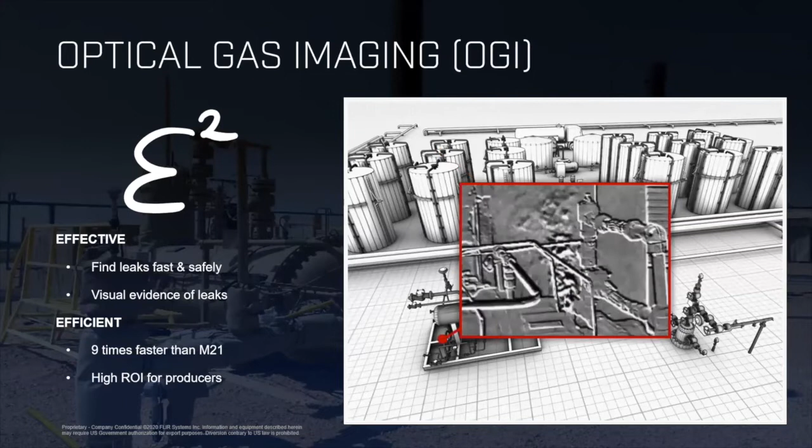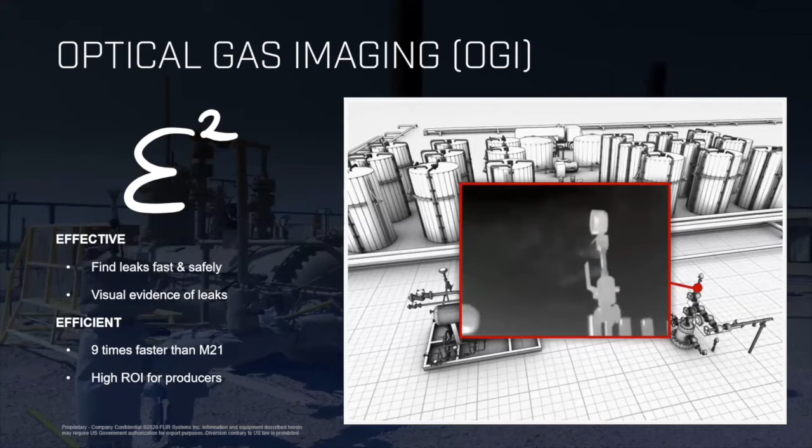Efficiency of optical gas imaging, with independent studies and field studies that have been done, it's 9 to 10 times more efficient and faster than other technologies like a TVA or sniffer. And even CODA talked about it earlier. It's a pretty high ROI, not just in the actual loss of leaks, but also the ability for organizations. And it was really interesting to hear a conversation which we've heard over and over about how these organizations learn more about their equipment and their systems by utilizing optical gas imaging in their LDAR programs.

A little bit on the optical gas imaging history, for those of you that may be a little new. The first commercial optical gas imaging camera came out in 2005, called the GasFind IR. It was a foundational camera for the EPA through the alternative work practice for Method 21. We took the industry feedback through the first few years of that product and came out with our foundational GF series, which is still the foundation product for us today, and advanced that product in 2017 with our GFX camera that is ATEX certified to be used in Class 1 Division 2 areas.

In 2019, we began getting outside of the regulatory confinement, and we launched the first version of an uncooled camera. I'll talk a little bit about this next, but it's an optical gas imaging solution, with this original product specifically geared for methane detection. It is not quite as sensitive as our GF series and our cooled solutions, but it allows organizations to go out there, and in essence, this is that piece of the puzzle that is a next generation technology for methane mitigation that's not directly tied, as optical gas imaging has historically been, to regulatory check marks.

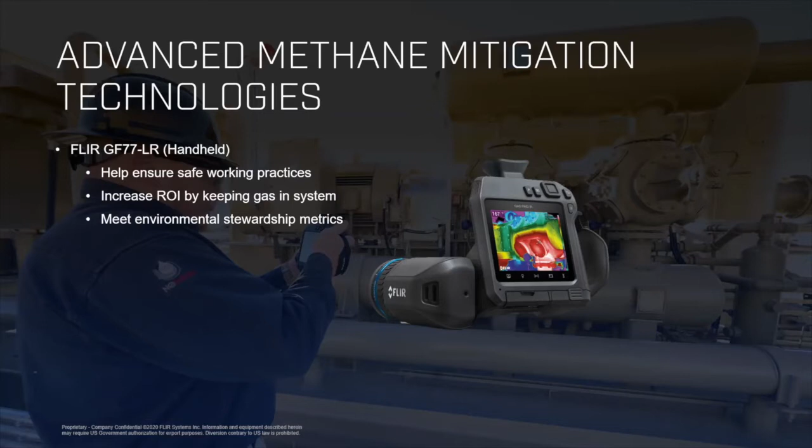This will not meet your Quad OA standards and requirements, but it allows companies like the ones on this call that are interested in furthering and advancing their methane mitigation outside of regulation. For those that might be interested in the same solution, but with a fixed mount opportunity, we have our GF77A. It is the guts of our GF77LR built into a fixed mount state-of-the-art automation camera.

So now this can look out, and we're working right now on the analytics, which is one of the videos you see going in the background. So we're working on getting better analytics, but we have industry partners out there with deployable analytics.

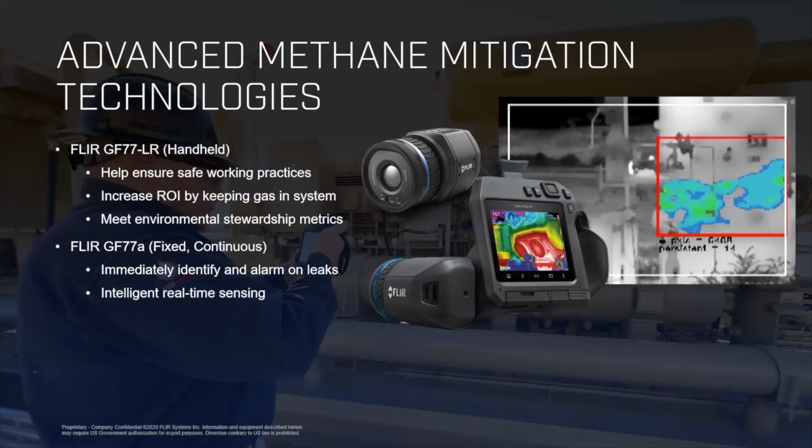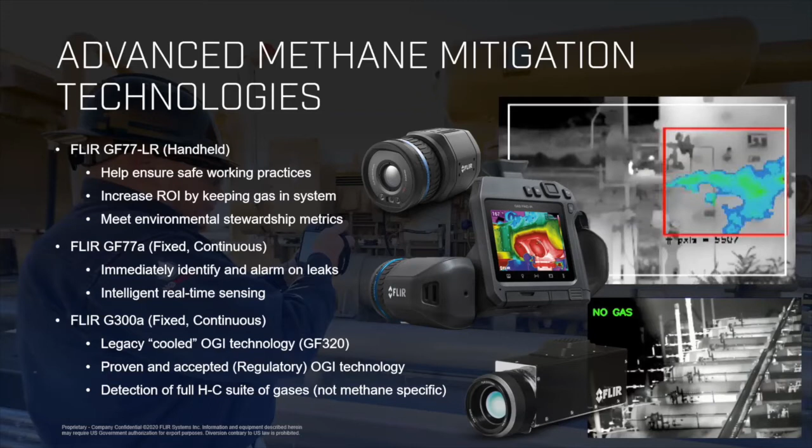And then for those that might be interested more in that mitigation, but also meeting some of the regulatory requirements, whether it be federal or state level in some of the states that you may operate, we do have a continuous fixed mount version of our Quad OA compliant camera in a G300A, allowing you to have a fixed mount continuous operation for methane mitigation that would be equivalent to what you're looking at.

And lastly, what do some people say in the industry about our solutions? I won't read all of this, but I'll highlight what's coming up in red. One large industry partner said, utilizing this, not only does it have a high ROI, it's great for environmental stewardship, but it also helps save lives. And that's a key foundation of FLIR, words directly from our customers, that this is preventing an accident that could have possibly killed someone.

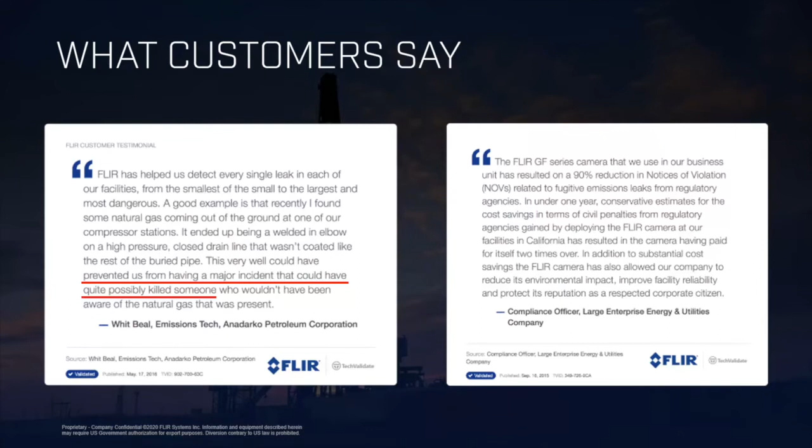And if you look more on the compliance side, outside of the ROI piece, it's reducing the NOVs that you're going to have, and allowing an organization outside of regulation to reduce its environmental impact and protect its reputation as a respected corporate citizen for emissions mitigation.